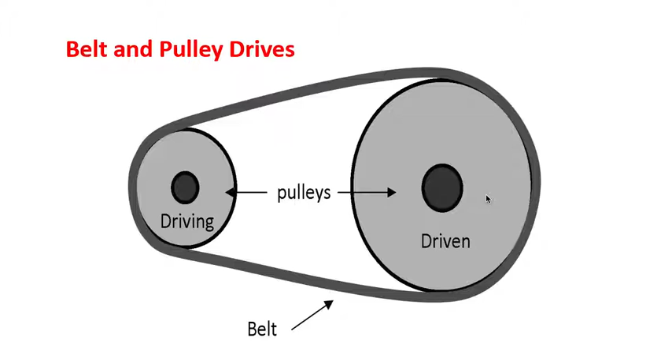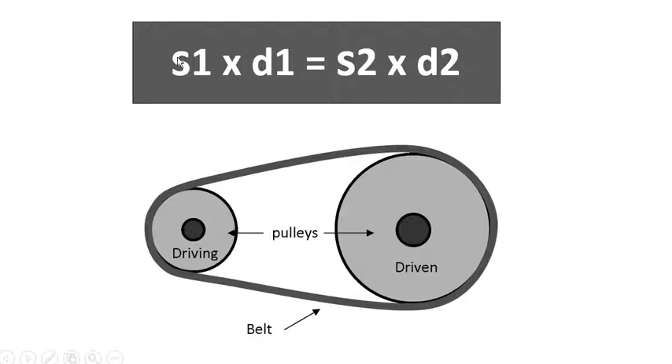They're linked by the formula S1 times D1, so the speed of the first one times the diameter of the first one is equal to the speed of the second one times the diameter of the second one. And much like the levers, if you know two on one side, so if we know this speed and this diameter, if we times those together and we divide by this one, we'll find this one. So let's say we want to find the speed of the second one, we will times these two together and divide by this diameter.

So we've got a motor that runs at 1450 RPM and has got a 200mm pulley on it. The machine it's driving needs to run at 1000 RPM, so we need to slow it down. And we want to find the size of the pulley that will slow it down to 1000 RPM. So we've got the two speeds, we've got one of the diameters, and we want to find the other one.

So S1 times D1, we know S1 is 1450, and we know D1 is 0.2 meters, which is 200 millimeters. So for this, we're going to turn it into meters, because that's the SI unit. So 1450 times 0.2, and we're going to divide by the other speed, by 1000. And that gives us 0.29 meters. So that's the diameter. So it's a bigger diameter which will slow down the speed.

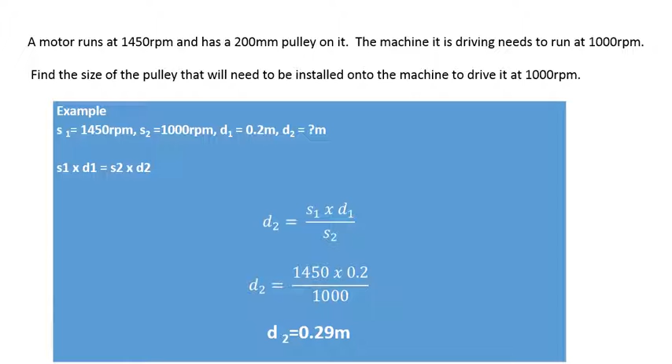Now to calculate the speed of cogs, the number of teeth can be used in the formula. So instead of looking at the diameters, you look at the number of teeth. So the speed times the number of teeth on one side will equal the speed times the number of teeth on the other side.

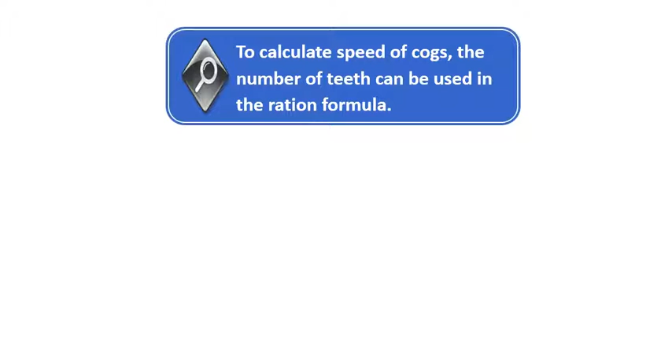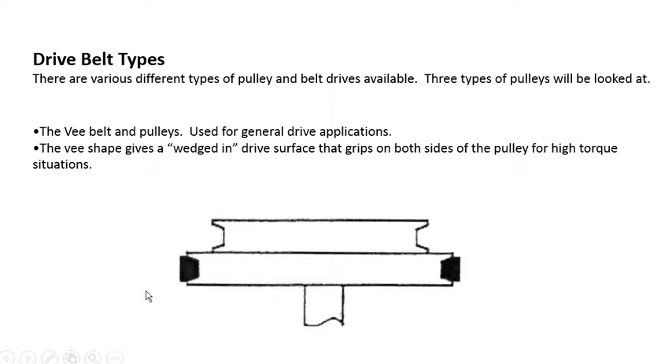There's different types of belt drives. This is the V-shaped belt and pulley. We have the toothed pulley and the flat belt and pulley. We've also got different types of gears. This is a spur or a toothed gear. This is a double helical gear, and this is a straight bevel gear.

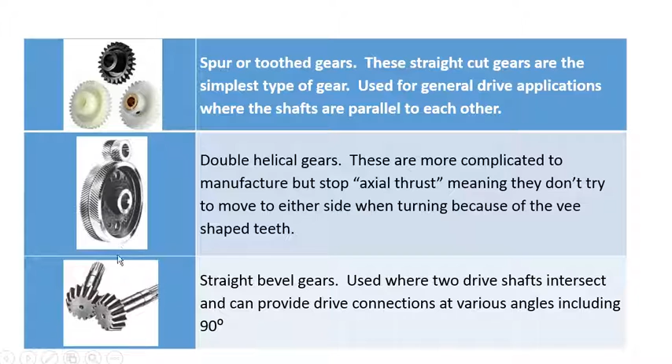Advantages and disadvantages of the pulleys and gears. So pulleys, they can economically transfer drive over a greater distance than gears. So if you've got a big distance between your driver and your driven, then you would use a pulley and belt system. They're cheaper to set up and maintain. They don't require lubrication, and they don't have backlash like a gear system.

But gears, they're good for changing direction in a drive. They're good for timing. You wouldn't want to just use a normal belt for timing. The gears are meshed, and they don't tend to slip. They don't need readjusting to maintain drive like a stretching belt might. Over time it will need to be readjusted. And belts will need to be replaced regularly as they do age.